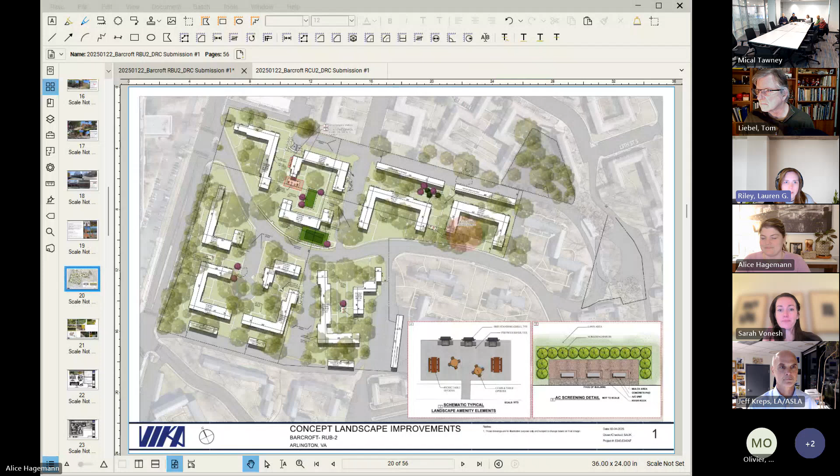Good evening, everyone. For the record, my name is Lauren Riley. I'm with Walsh Colucci. We represent Jair Lynch Real Estate Partners with regard to the Barcroft land use entitlements. And just to introduce everyone here tonight, we've got Alice Hagemann with Jair Lynch. I see Jeff Kreps here with VIKA, our civil engineer for the project. From Traceries, we have Sarah Vonesh. And then from the architect team, we have Tom Liebel, Martin Olivier, and I think Danny Mickelson is here as well. So our whole team will be available for questions as we go throughout the presentation tonight.

And just to give a little bit of background on where we've been and where we're headed, we started this process almost 2 years ago with the first renovation project in Barcroft. We've had 4 renovation projects approved. The most recent one was last June for the phase 4 project. And since then, Jair Lynch and the county have been working to update the form-based code amendments to reflect the vision of the master finance and development plan that was also approved last summer.

Some of y'all may be aware that we went to the expanded Columbia Pike Advisory Working Group a few months ago to discuss those revisions to the form-based code and solidify those changes. Those will be going to the board next month in February. And in terms of the renovations, as we look ahead, we've decided to divvy up all of the remaining buildings to be preserved and renovated in Barcroft into 3 use permits. So tonight we'll go over 2 of them, what we're calling the RBU2 and the RCU2 use permits. Next month, we'll bring the 3rd and final one before you, which is going to be called RA2, and it'll deal with the remaining units down there in the tail of Barcroft.

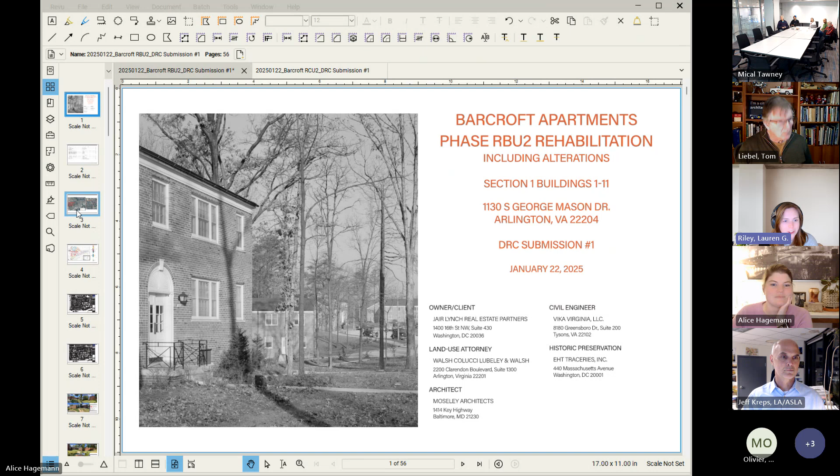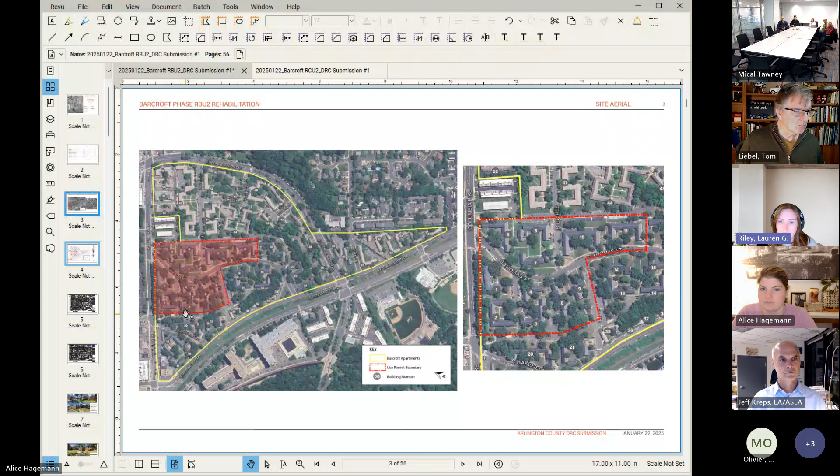And so tonight, we'll move through these presentations in a quick manner, because the scale of these is a little bit larger than what you've seen before. As you can see here, this first renovation phase, RBU2, encompasses 11 buildings and a little over 300 units. So we'll be giving you some highlights tonight over where these are located and the scope of work. Vika will go over some landscape updates, and then Tom and his team at Moseley will hit on the main architectural changes. Once our presentation's over, we're happy to come back to any of these slides for discussion, and these are generally the same ones that were submitted to you a couple weeks ago. So if we go to the next slide, Alice.

So here's that very helpful image that Sarah at Traceries has developed. This shows the location, the outline of this renovation area. So it's 11 buildings, buildings 1 through 11 in section 1 of Barcroft. So these were the first buildings to be constructed in the Barcroft area. Couple things to note here.

We have 2 garages that will be preserved. They're behind buildings 10 and 11. And Moseley and Alice can go over some of the scope of work there, but it's mainly going to be repairing those existing garages to remain. The roofs are intact, and we'll just be doing some cleanup items on those garages.

The remaining 3 garages there that are behind buildings 3, 4, and 8, those will be demolished as is anticipated by the Master Finance and Development Plan, as well as the Columbia Pike regulating plan. I will note that building 3 was in the area that could be adjacent to the conservation area, could be redeveloped. Jair Lynch has decided to keep building 3 as it's not necessary to demolish it for future development. So we'll be retaining that.

And then we've also, as part of the updates to the form-based code, we're no longer removing or demolishing a portion of building 6. If you remember early on in the process, we had proposed putting a resident amenity center in that location for residents of Barcroft. Jair Lynch has now decided that that resident amenity center will be located within one of the new construction buildings, and so we won't need to alter building 6 or demolish it to make way for that resident amenity center, though you'll see in some of the landscape updates where we're providing some more usable space there for the residents as a whole.

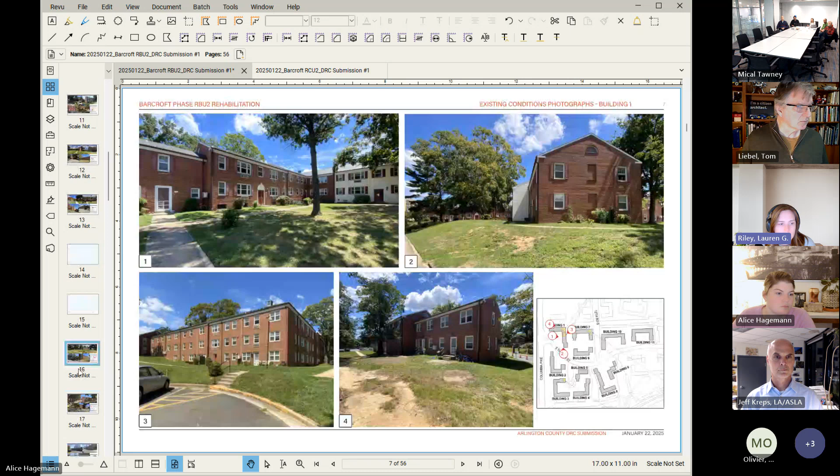And then we're going to skip through some of these more technical slides and the photos. Happy to come back to these if we have any specific questions. And then in terms of the scope of work, this is going to be very similar to what you all have seen with the past 4 renovation projects.

We will be cleaning up the brick, infilling openings for exhaust systems that we no longer need, and adding new openings to accommodate mechanical equipment and exhausts. Primarily, that will be on non-primary facades. And then we'll also be replacing light fixtures, shutters, railings, etc. We'll be making some improvements to the courtyard to provide and program some of that outdoor space for the residents.

Here in this use permit, we'll be creating 5 type A accessible units. This will occur partially through conversion of 3 existing units to accessible, and we'll also be able to add 2 new type A accessible units in this section. And then along with that, as with previous renovations, we'll have to introduce some new penetrations and enlarged openings to accommodate those new accessible entrances. There'll also be some ramping in a few places as well, and I think Moseley can go over where those instances occur.

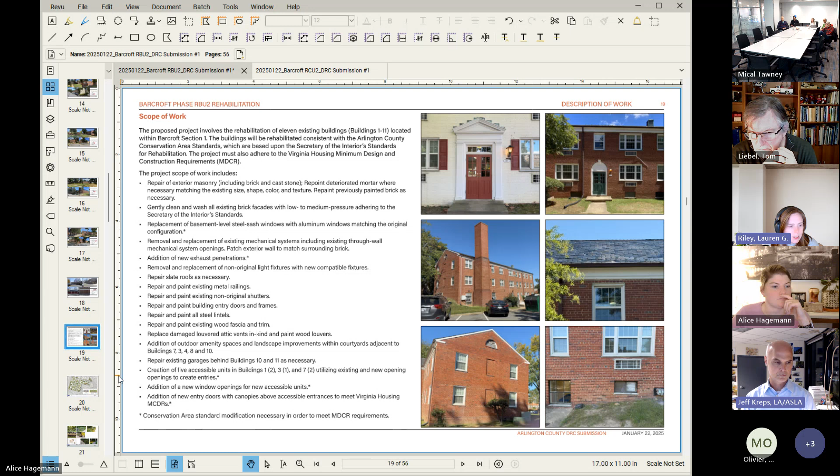And then with that, I'm going to hand it off to Jeff and Vika to go through landscaping, and then I think he'll hand it off to Tom at Moseley to go through the architecture, and after that, we'll quickly go through the highlights of the second use permit, and then we can open it up for discussion and Q&A.

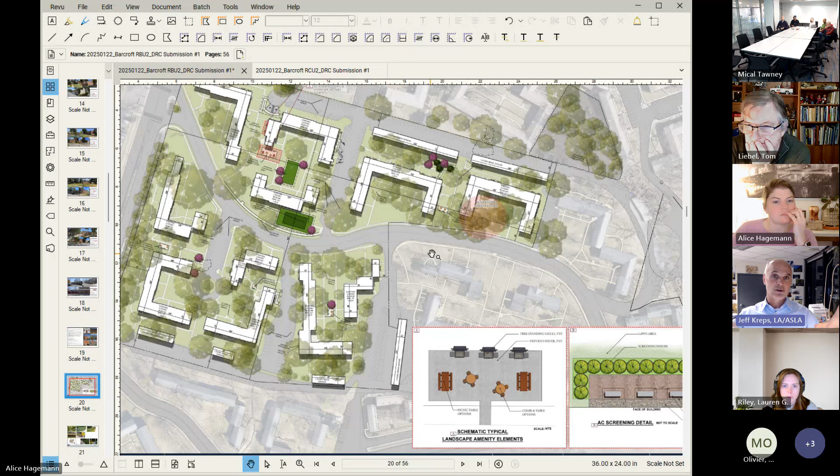Which is something that was approved with the MFDP plan set. And it's what amounts to a series of pathways throughout the Barcroft property that help the community, not only the residents, but the community at large who may come through the Barcroft site, basically experience the natural characteristics of Barcroft and also learn a little bit about it.

So what that really boils down to is we're utilizing existing sidewalks on the property to take people from essentially, if you're going east-west from George Mason up through the site, through the RCU2 part, then across Thomas Street and then to RUB2, right? And then ultimately all the way down over toward Four Mile Run. And what it amounts to, as you can see on the screen here, is, again, we're utilizing existing sidewalks. We have to be careful when we're planting underneath existing tree canopy, not to disturb the roots.

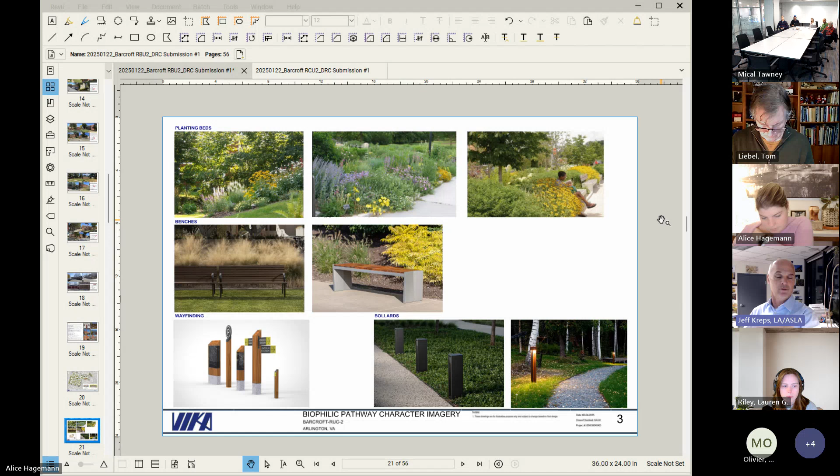And so what we're trying to do is provide low-level, ground plane level, enhanced planting. Because right now, if you've been out there, if you remember, it's primarily just really tall trees and then grass. And there's very little in the way of shrub planting. So our goal with this pathway is to enhance the pathway with some nice seasonal native planting that, again, helps reinforce the idea that you're in nature.

We're going to provide the occasional bench for someone to stop. As you know, it's hilly. People are going to walk and they're going to want to maybe have a place to pause and take it all in. So there would be benches periodically. We haven't finalized the last details, but there would be some sort of bollard or marker lighting along the way, not necessarily for safety, because there is existing site lighting on site, but a way of sort of lighting the way. It's the yellow brick road from here to there, right?

And so what we're showing in the lower right-hand corner are some ideas of what that might look like, right? Some lighted bollards or some non-lighted bollards, bench ideas. And then there would be occasionally some wayfinding, and perhaps some interpretive signage, used to describe the ecosystem of Barcroft, what you're walking through, what's above you, what's beside you, and then helping to begin to tell a story throughout the entirety of Barcroft.

And again, this is open to the public, people who wander in through the property, cut through the property, as well as the residents. And it begins, I think, to add an element of richness and detail that currently doesn't exist. And it will, in a sense, also help get you from point A to point B. If you look at it, you can follow it and go all the way from one side to the other.

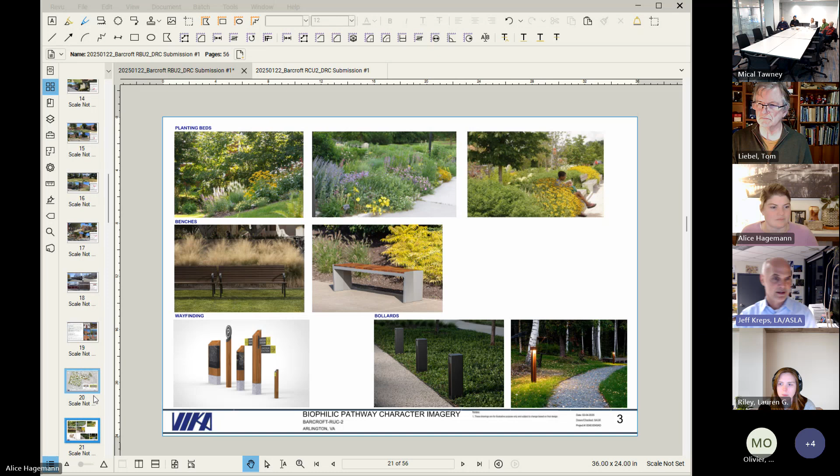The other main axis will be Thomas Street, which runs north-south. And the eastern side of that street would also have, again using the existing sidewalk, this kind of planting, in addition to some street tree infill where we can. And again, it begins to define that edge and introduce another layer of interest for people using the sidewalk. So that's one of the primary components of both of these use permits that are before you this evening. And then if you want to go to the next one, we can talk quickly about RUC2.

Do we have the plan map? I was going to go, Jeff, I was just going to go through all of the RUB2, okay, and then we'll come back. Yeah, that's great. Okay, cool.

And I wanted to interject and say, I'm sorry I don't have a plan of the biophilic path locations readily available, but if anyone's interested, at the end of these presentations I can pull it up, or while we're discussing that, I can follow up with that in a little bit.

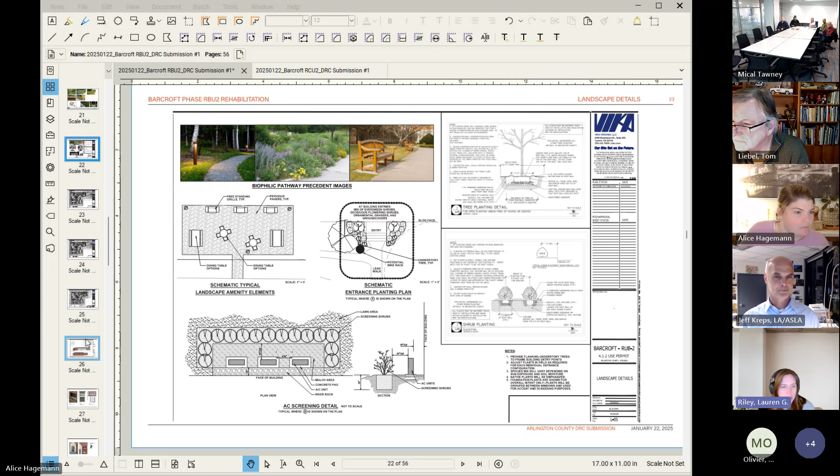All right. With that, Tom, you want to take it away? Absolutely. And thank you all. And it's great to be back here.

I'm going to branch off of what Jeff was talking about and emphasize the notion of flat. We have been struggling throughout working on the campus here to provide accessible units, and to remind everyone, accessibility isn't just about being able to get into the building at an accessible path. It's actually getting to the building. And so many other parts of the site here, you simply can't get there.

You can't park and then find a path to get to a unit that's accessible. So we do have more accessible units here than we've seen previously. The modifications that we're suggesting are sort of twofold, one of which is preserving, maintaining, and repairing the existing buildings. And the other one is creating these new accessible entrances and egress for some of the new lower level entrances.

But as you can see on the building diagrams, like on the upper one there, elevation B north for building 1, a lot of what we're doing is kind of undoing bad things. There are these large through-wall mechanical units that we are demolishing and re-infilling with brick to match. So we're actually undoing some of those insensitive installations from the past. And on secondary elevations, we are looking at creating much more modest brick-sized louvers for required exhaust systems.

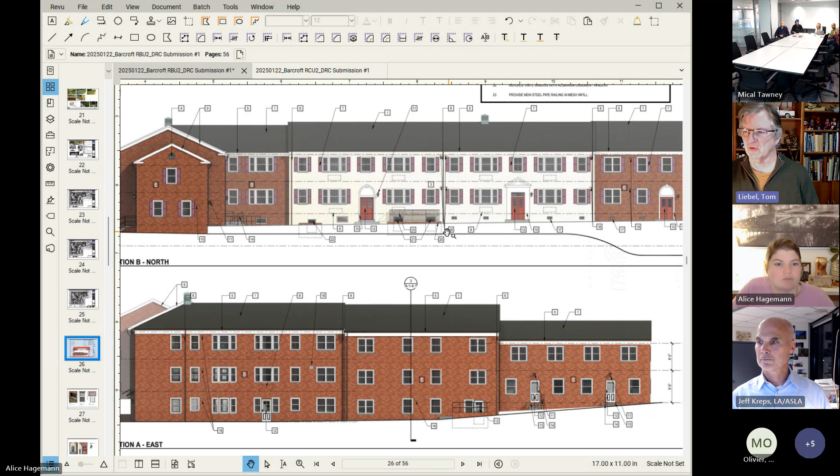A lot of these, and the general repair of the existing entries there. You are seeing a couple things like the little hatched wiring you see right there. That is where we are proposing to extend areaways down to create egress windows for some new lower level units there that are required by code. For the most part, they are out of the way. They are down below, and modifying those openings seems to be much less significant than modifying any of the upper level windows there.

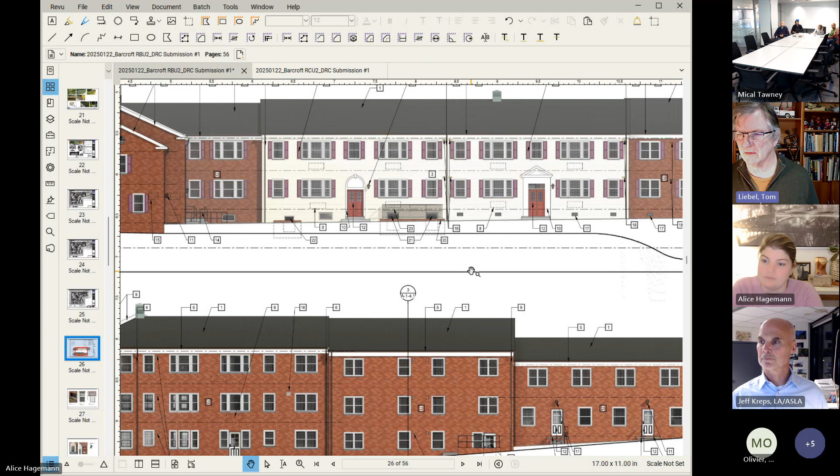And then we've been using design based on the existing pipe handrails, but to provide code compliance, we're showing these infill mesh panels to make sure we can pass the 4-inch sphere rule that's required by code. Those are sort of the primary things, and you get to some of the other modifications that are tied more to accessibility on some of the other buildings.

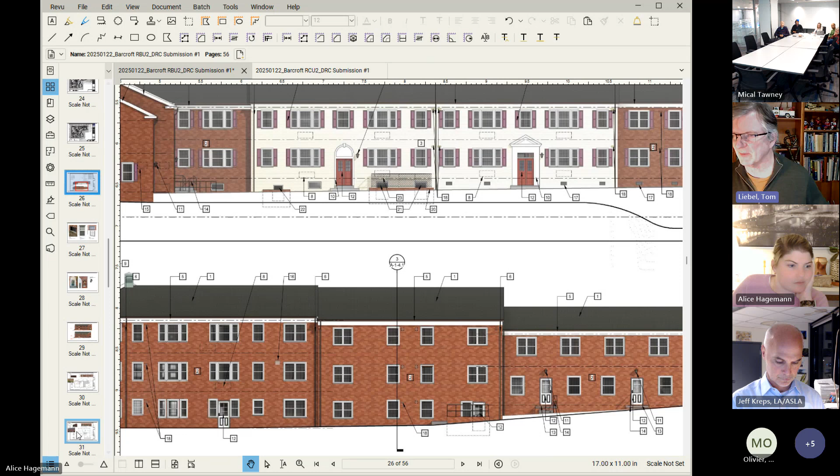As both Lauren and Jeff mentioned, we are looking to create or widen some existing openings, or create some new openings, and with that, they would have a new covering associated with them, a new canopy, trying to meet the requirements that Virginia Housing puts out, while also meeting the historic preservation requirements here. So we are not providing coverings over the existing entrances, which open into stairways and into units, which, while technically required by Virginia Housing, we've gotten variances for. While we are showing those coverings over the new entrances that are directly into the accessible units.

Number one, it's a Virginia Housing requirement, but also it's just good practice to provide that covering, so during inclement weather you can get into your unit there. Fundamentally, all this is work that you have seen previously in our prior submissions and ultimately found to be permissible by the commission here. So that's it in a nutshell.

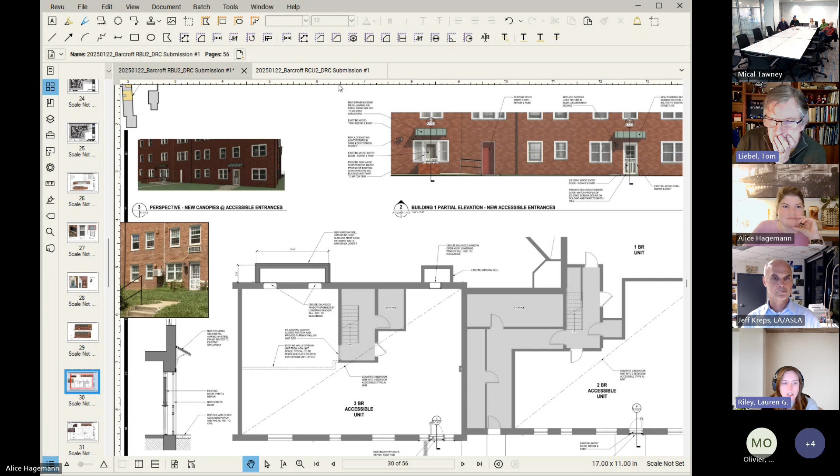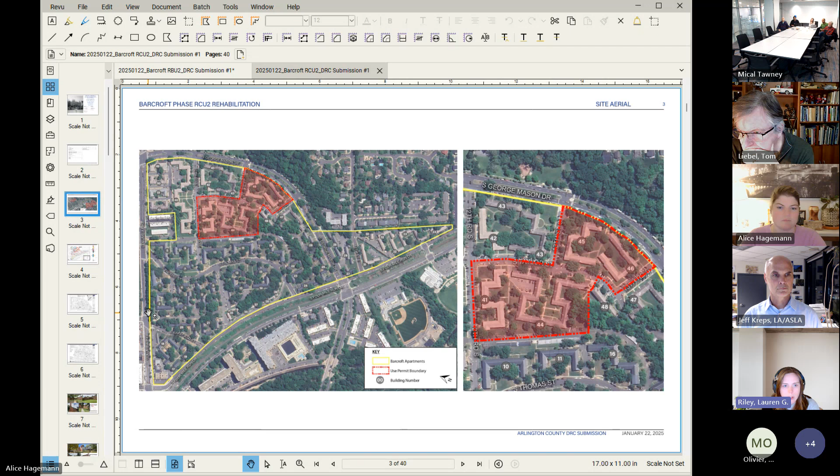All right. Thanks, Tom. And then let's quickly go through some of the RCU2 submissions, just to highlight where these buildings are and what the scope of work will include. So here, this use permit will include 4 buildings. You can see there, buildings 44 through 46, coming off 12th Road South and headed down toward South George Mason Drive. And if we go to the next slide, you'll see these buildings are located within sections 6 and 7 of Barcroft. These were constructed later, in the late 1940s, as part of the latter phases of Barcroft. These existing buildings today include about 220 units.

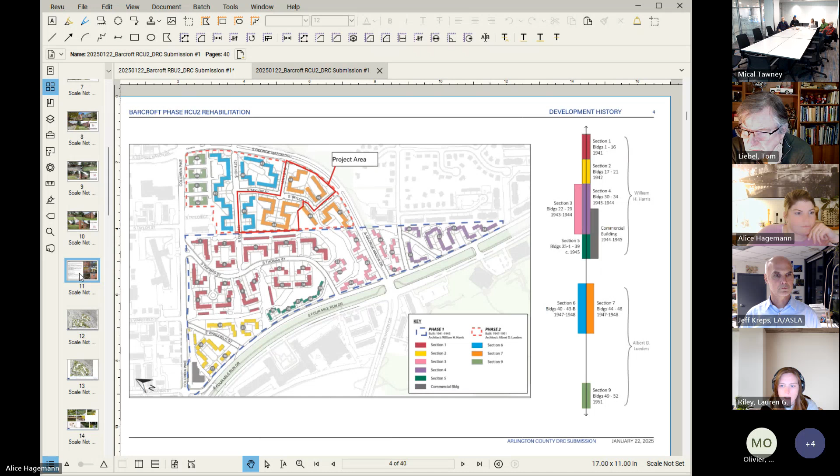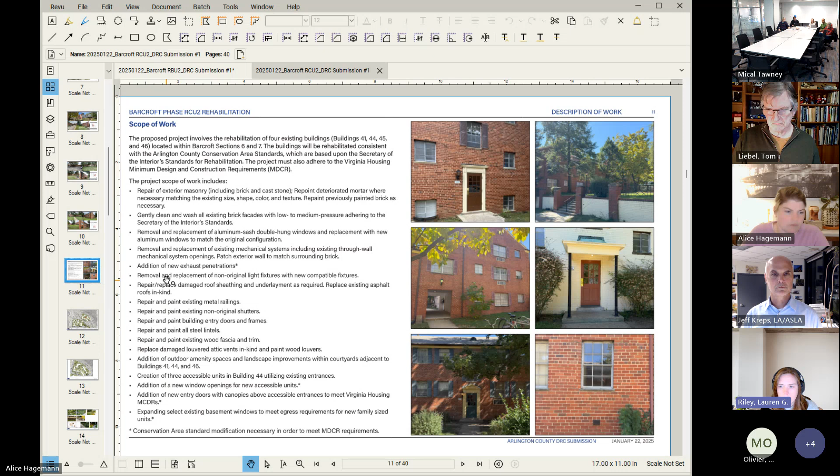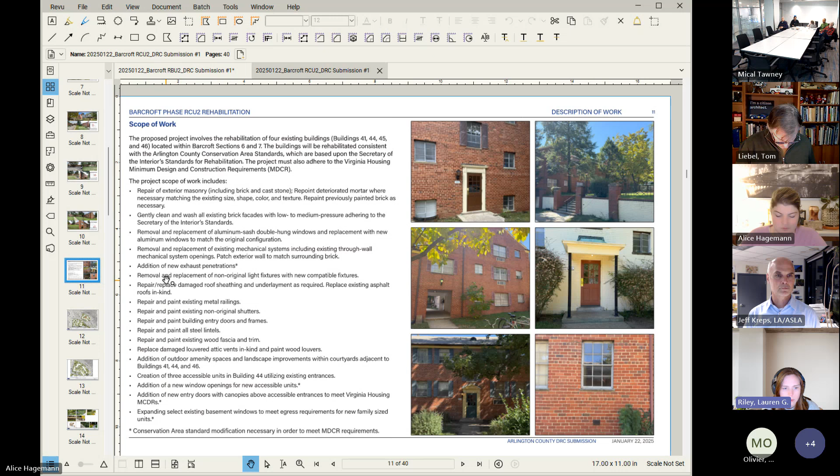And then we can get into the scope of work slide. Again, almost the same scope of work that we discussed for the previous use permit. There are no garages in this section, so we won't be dealing with those, but we will be cleaning the brick, replacing mechanical equipment, so infilling brick and introducing new penetrations on non-primary facades. In terms of accessible units, we're able to create 3 accessible units in building 44, through a conversion of existing units. We'll have the same Virginia Housing waivers and the same form-based code modifications here. And so now I'm going to hand it to Jeff to show you some of the site-specific changes that we're doing to accommodate those accessible units and general upgrades.

Hope you're muted. Thank you.

So just to help orient you, George Mason Drive is sort of arcing along the top of this drawing. Columbia Pike is way off to the left in plan view. So this section abuts the previous one that we just looked at. And rather than go through all the details, similar things are being proposed here. As we mentioned, individual building-oriented small outdoor gathering spaces in these little courtyards.

And then, as Lauren said, sort of central left, you can see where we're adding parking spaces, ADA compliant parking spaces to get into the buildings in that unit. That's one of the flat spots again on the site, so it worked out very well from a grading standpoint. So that's all fairly unobtrusive. And then they're on the bottom side as well.

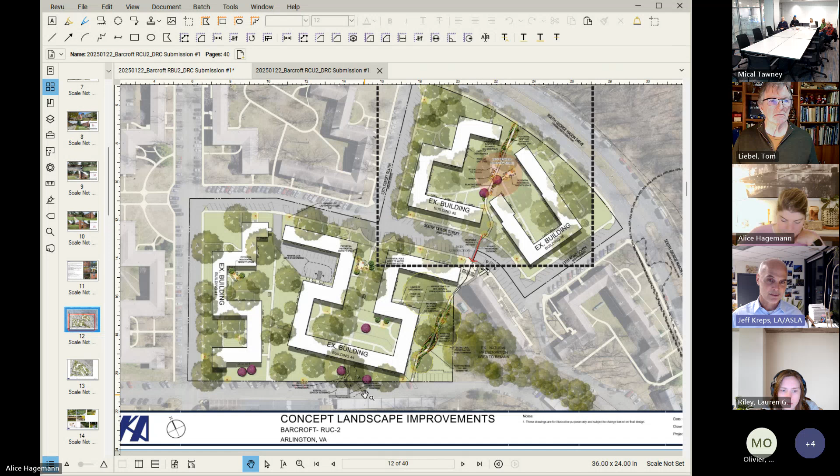Now, one thing I will spend just a little bit talking about is this plan shows perhaps a little better than the previous one the biophilic pathway, right? So it comes from George Mason and is effectively going uphill from George Mason, all the way between the first buildings. It crosses the street, then continues up through what is identified in the Columbia Pike and the form-based code as a natural preserve area, which is sort of toward the bottom of the page there, underneath the tree canopy.

So again, our goal is to be as sensitive as possible to the existing tree canopy so as not to disturb those root systems, while at the same time providing an extra layer of ground plane planting to, again, create a tapestry of native plants that are used throughout the project, begin to bring some unity to pedestrians moving through, and to identify this particular element as a thing within Barcroft. So that's the high level, right?

And then there are a couple of places where the trail ends and we're no longer on sidewalk, and we're going to, via some sort of painted asphalt implementation, show people how to get, again, yellow brick road, right? How to get from point A to point B with some signage, and then they continue on their way. So it's a really nice opportunity to do something that benefits not only these residents, but also the wider community. Because again, with some interpretive signage and some level of detail, it'll be a very, very pleasant walk through what is already a very nice site.

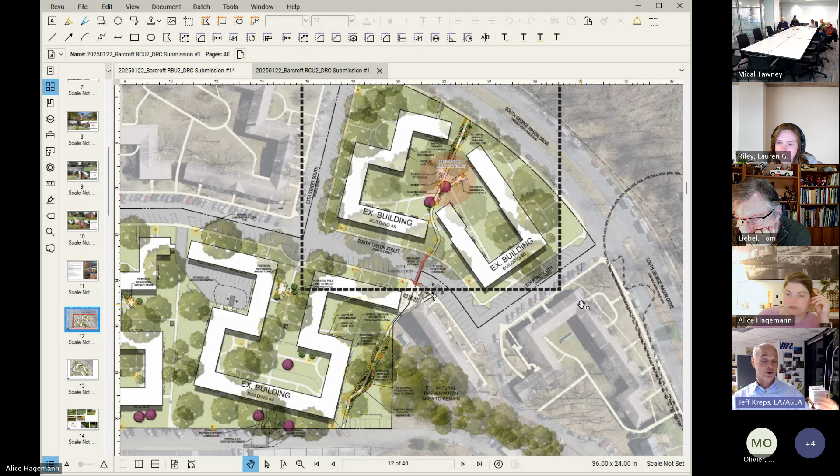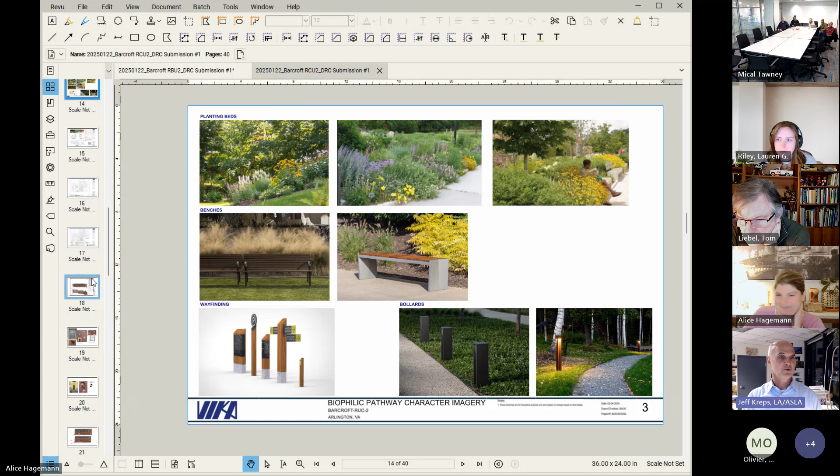And with that, I think that pretty much sums up what we're doing on these sites. That's just a blow up of what we were just talking about, and then the same elements that we're proposing to carry throughout the project. So again, similar kinds of detailing, wayfinding and lighting and benches and whatnot. So that, I think, about sums it up.

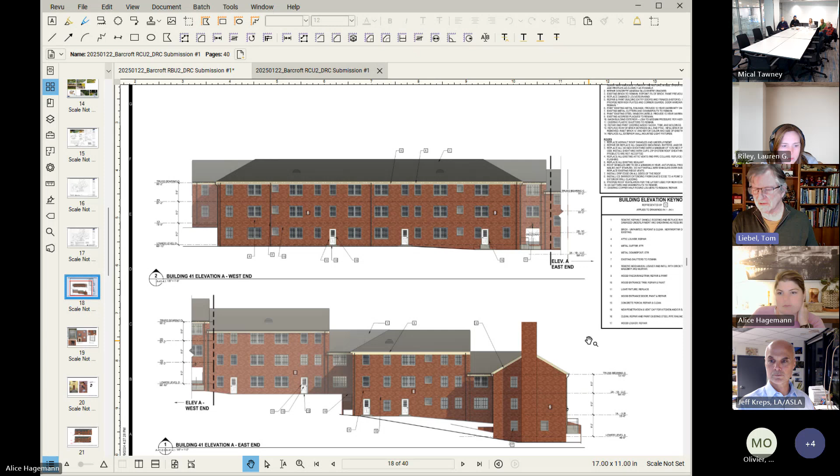All right. And similarly speaking here, the vast majority of our work on the building exteriors here is standard preservation, conservation, cleaning the brickwork, repairing damaged material where necessary, replacing some light fixtures with compatible lights that are modern, and then in limited areas creating, there we go, right there, light fixtures like that.

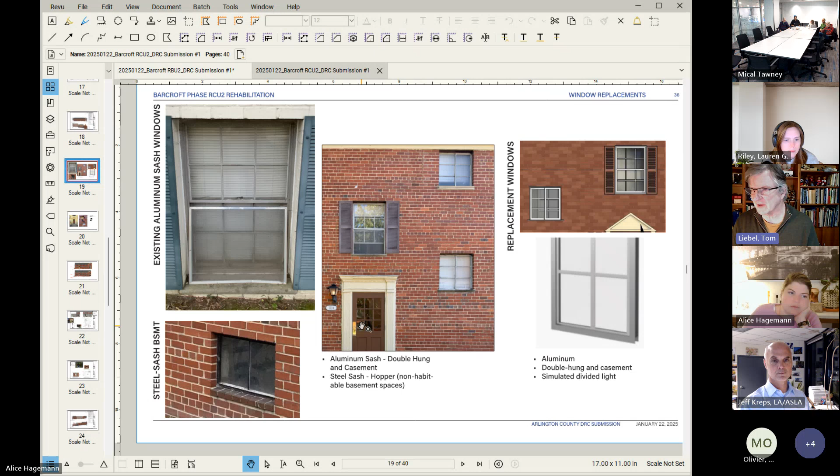Requesting variances from Virginia Housing for the majority of the spaces, and then ultimately looking at some window replacements, aluminum clad, and then ensuring that the design and execution of the windows is consistent with what was there previously in terms of the frame dimensions, the mullion thicknesses, the demising of the lights, to match what's there existing. Once again, work that you all reviewed previously, and we're just trying to maintain a similar approach in these new phases here.

Then these are where the new accessible units are as well, exactly. So creating those new opportunities on secondary elevations. Once again, we've been very conscious of trying to make sure that when we are doing efforts like this, they are on secondary elevations and not on the primary elevations that are fronting onto the roadway here. So trying to find ways to tuck them in as discreetly as possible.

All right, thanks, Tom and team. That concludes our presentation. I know we've zipped through quite a few slides, so we're happy to go back and bring anything up that you all want and answer any questions that you have. Thank you. Immediate thoughts, questions?

The awnings over the doors, I assume that's been looked at before and the design's been approved. Yes, Lauren, that's correct, right? That the awning design is the one that has already been looked at. It's the same thing, the one that the HALRB's already been okay with. Yes, this is that standing seam metal awning. It's the same one that you've seen on the prior couple of use permits.

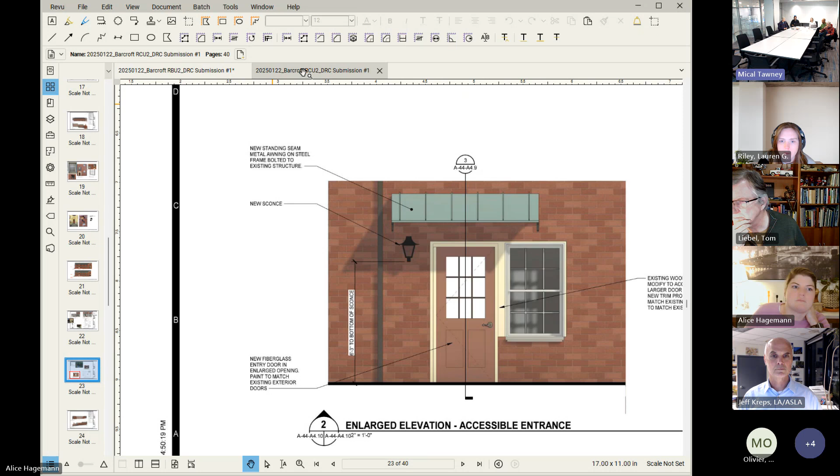Okay. And then again, we'll only be retaining these above the newly created accessible units, which I think would be 8 units in total across these 2 use permits. And those are all on secondary elevations. That's correct. We don't have any new entrances on primary elevations.

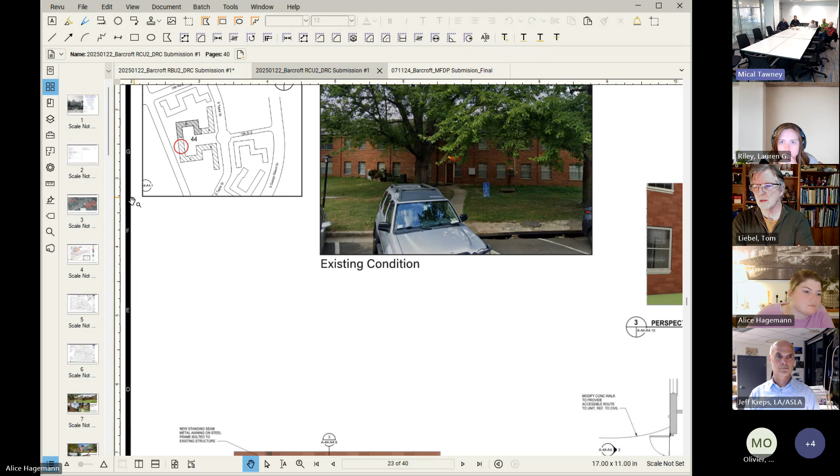And then, are there some buildings that have existing awnings? Currently I noticed a couple of sort of almost triangle-shaped awnings on buildings. Yeah, they're not really awnings as much as they are sort of pediments. What we were striving to do is create a sympathetic yet visually distinct new canopy element that goes with the existing buildings, but does not read as part of the original material. So you can clearly understand what was original and what's been added in.

Yeah, and where you do see these existing elements, these are typically in the phase 2 portion of Barcroft, like this one shown here. And I think we had 1 or 2 in the renovation use permit we did last year as well. So as Tom is saying, we're evoking that similar style with the new awnings in front of the accessible units, but not replicating it exactly.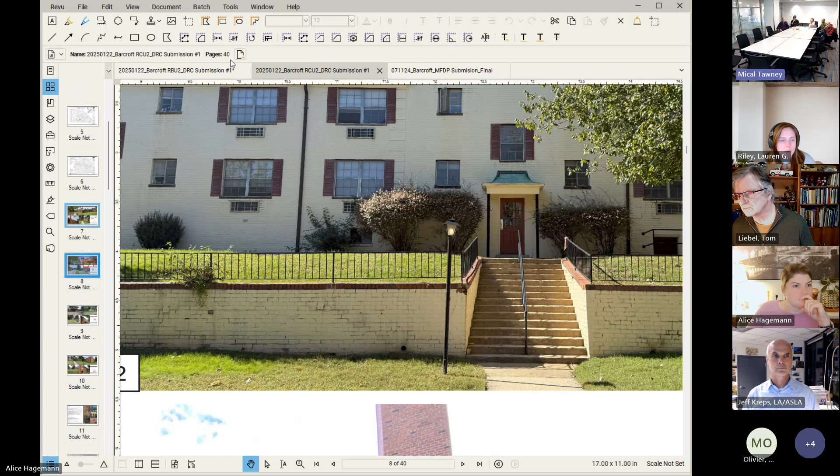I had a question about, I believe in the section 1 portion, where there were going to be windows at the lower level for egress, and then there was some discussion about a mesh situation in front of it. Panels, yeah. Can we get a closer look at that? So what we're proposing is basically a standard pipe rail frame, matching that which is there on site currently.

However, since it would be a new element, it has to meet current codes. It's called the 4-inch sphere test, and you can't pass a 4-inch sphere through any part of that railing. So we're proposing a mesh that is as transparent and minimally visually intrusive as possible. We felt that was a little less onerous than doing something like 1-inch pickets at 4 inches on center.

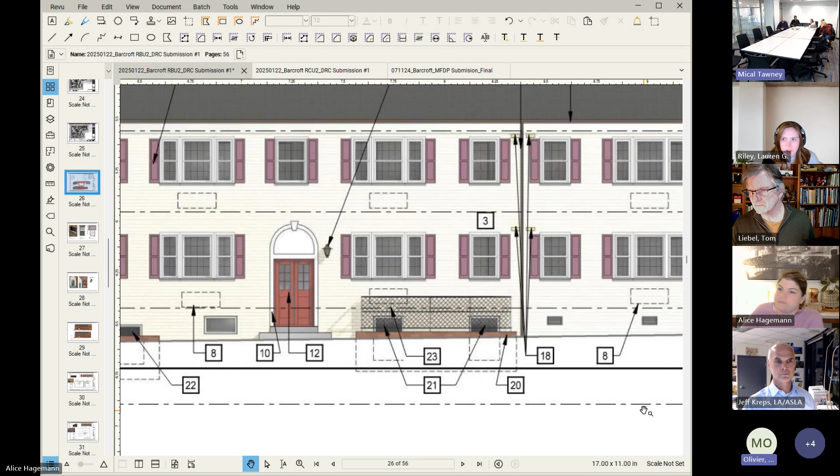Yeah, and I think the reason you're seeing the mesh now and not previously is, Tom, is it right that there were already railings there in previous locations where we had to enlarge the windows, but here there weren't, so now we have to meet the current code requirement. Okay. And although we don't regulate color, I assume they're going to be painted black like all the other rails? Correct. Because when they're painted black, they disappear a lot better than if they were white.

It's the nature of rendering here that the mesh fabric itself is less visible in real life than what you're seeing right now, but it's just the artifact of trying to draw something at a small scale. Even tiny lines get fatter.

Just a quick, maybe dumb question, but if you escape from the bedroom units, how do you get over the rail or through the rail? It's a matter of climbing out, and the notion of it being there is also for fire rescue being able to access from top down. So it's not just residents getting out, but it's getting fire personnel in.

Well, that's all fine and good, but if the building's on fire, how does the resident get out of that space? There should be some sort of gate or steps or whatever so they can get away from the building. That is a good question. We can look at potentially adding a little ladder element or something in there.

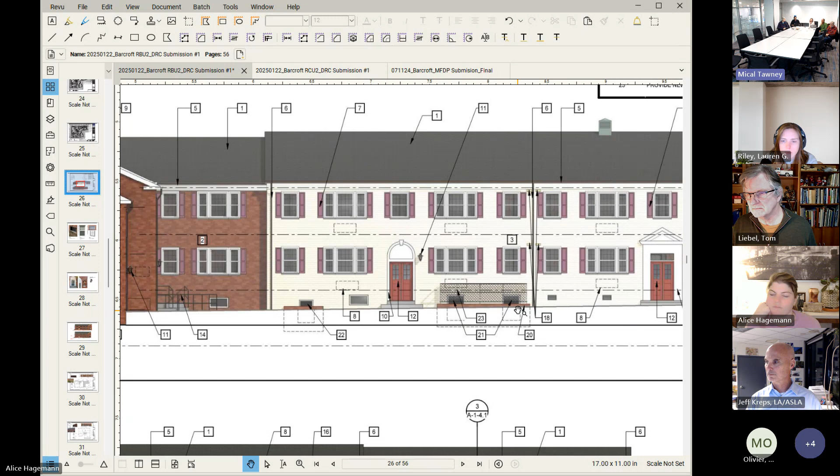Any other questions, comments? On the landscape plan, what were the purple trees? Were they just design? It's just a graphic convention to indicate a different species, perhaps an understory tree. Yeah, are those the smaller understory trees, Jeff? Yeah. Typically that's something that's flowering, so dogwood, redbud, something like that. That's just our way of differentiating those from a larger canopy tree. Okay.

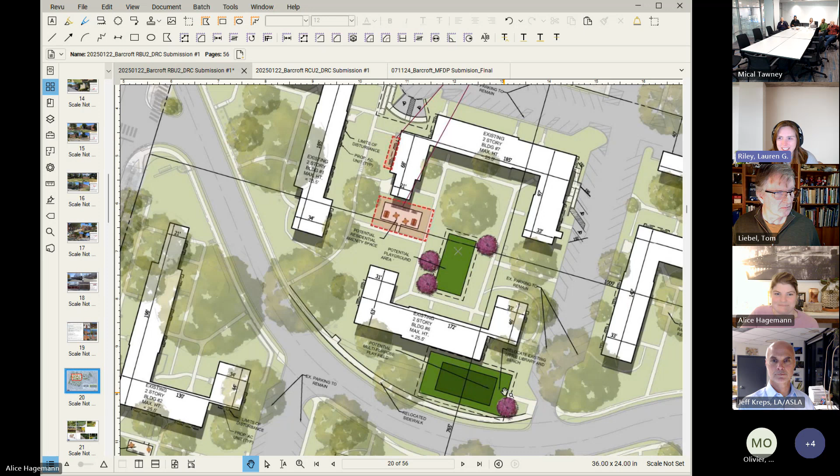All right. Anything else? Yeah. Can we see any of the accessible units, ramps and whatever, how those look? I assume they look similar to what has already been proposed, but I'd like to see one of them. Yeah, Alice, so the page you're on before had one with a ramp on it. Yeah, I was gonna say, I have them all in one section here, so this is the first one.

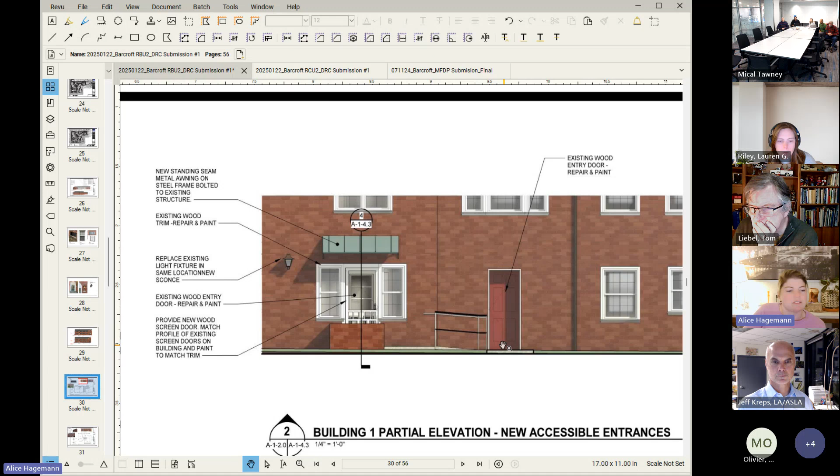You can see the existing condition here, and this one doesn't have ramping, to Lauren's point. I guess there's a small ramp in front of the, sorry, let me just go here, while we're here. So small ramp here. This one is a more intensive ramp. As the whole team has mentioned, topography is not in our favor here, but we were really grasping at straws to find these accessible unit locations.

This is really similar to what you all reviewed in our second renovation phase down near the tail of Barcroft, where we had these kind of switchbacks or longer ramps that are needed to get you up to the entries. So I think Tom and Jeff were using the same kind of materials and treatment here as previously. Correct. Yep. But, well, this seems like an awful long ramp, or if it's a switchback, even more so.

Well, it's actually one directional. It's a ramp in one direction, but once we get up to an entry elevation, it's basically a walk down to get to the other one. So it's not switching back; it's ramping up. You would have the same amount of ramp to get to just one unit. But once you're already up there, you can traverse down to get to the second unit. So we're using one ramp to get to two entries.

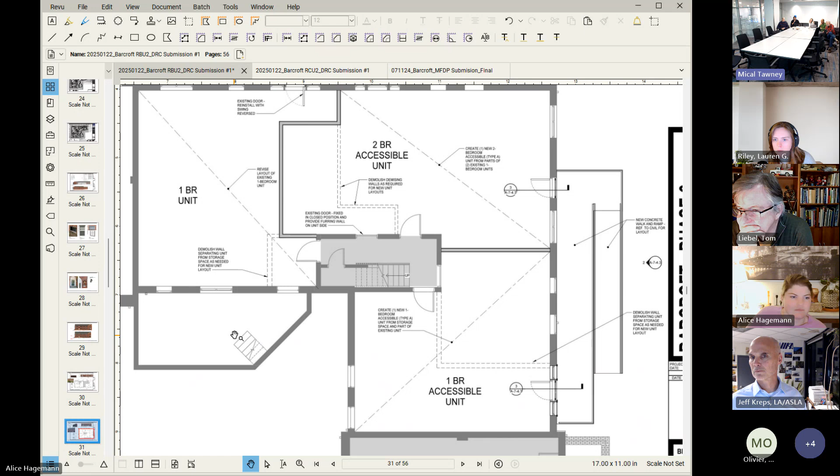Yeah, I see that, but it seems like what you're doing is putting a pretty significant amount of access and calling attention to the fact that it is accessible. And in my opinion at least, I think that's detracting from the building. But they need to get the handicapped up there.

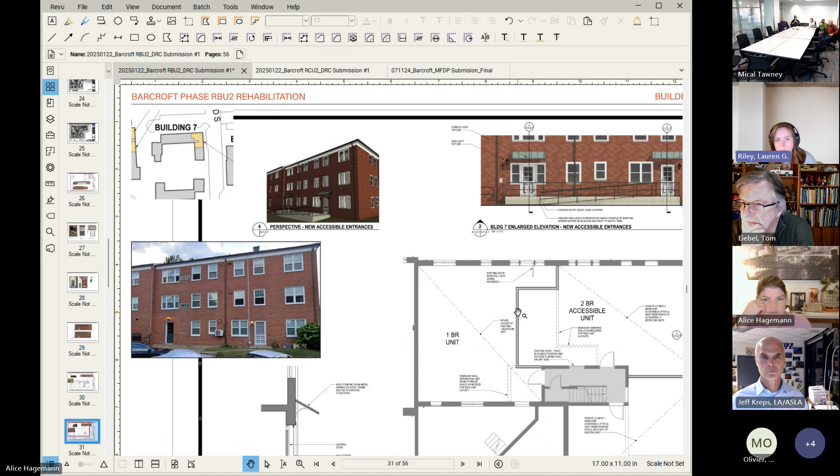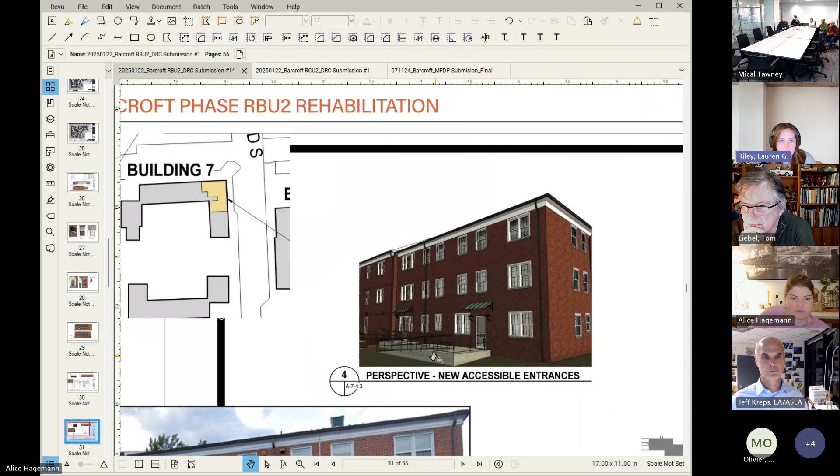And Andy, what I like about it is that by putting the ramp in front of the platform, it minimizes the size. You can imagine this being much bigger, actually. If it were one linear ramp, it would be larger. That's why I've kind of folded it in there. If we look at the perspective at the top left of your screen where you see building 7, that shows where these entrances are relative to the rest of the buildings, tucked back near the parking. That's another reason we've located them here.

As Tom said, accessibility is not just about inside the unit, but about getting to the unit. So this allows folks to get from the adjacent parking over here into this side elevation of the building. And it is a side elevation, not one of the primary elevations fronting onto the street. So it'll be relatively tucked away and not noticeable unless you're in the interior of the site.

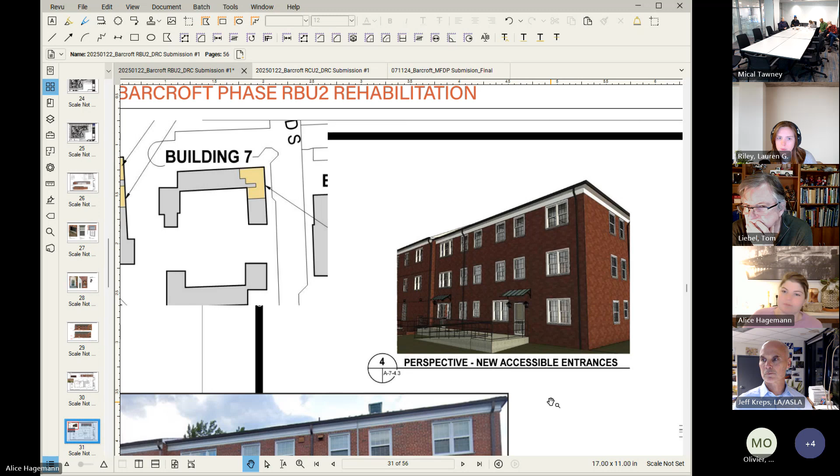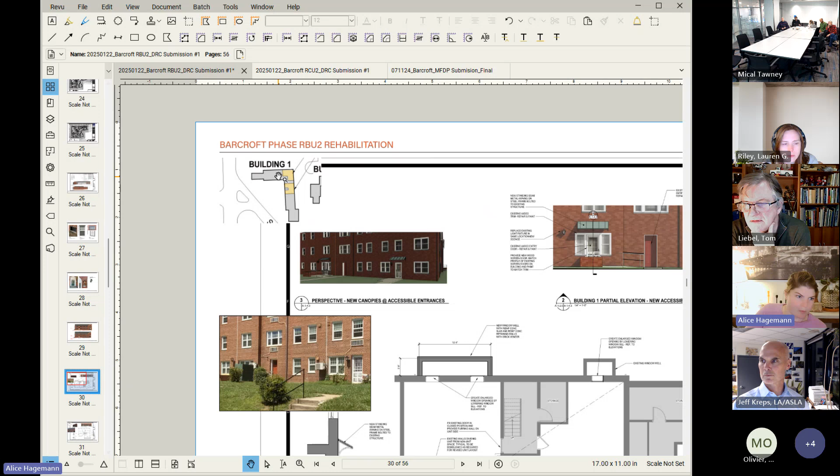Are any of these proposed within the little courtyards that you've got? Typically, the primary facades are off of the courtyard, so we've done our best to locate ramping not in the courtyards. This last one we looked at is also on the outside of the building. Here's the key plan up here. Building 1, building 7 we were just looking at, and building 3 is the last one, where the courtyard is inside, and we are creating a new entrance on the end of the building.

We have done a fairly extensive study on the entire campus, working in partnership with Jeff and his team, to identify which spaces you can even begin to get to, and once you get to it, can you get in? So the areas we're proposing here, after a significant amount of study to get the limited number of units that we have, are the ones that have the least impact on the historic resource.

Well, I'm concerned actually with two things. One is impact on the historic building, and believe me, I used to work for an accessibility architectural firm, Paralyzed Veterans of America.

And one of the issues with accessibility is that for people, whether they're in wheelchairs or using walkers or whatever, calling attention to their disability with long ramps and, using their words, making a spectacle of their getting in is really not a good idea.

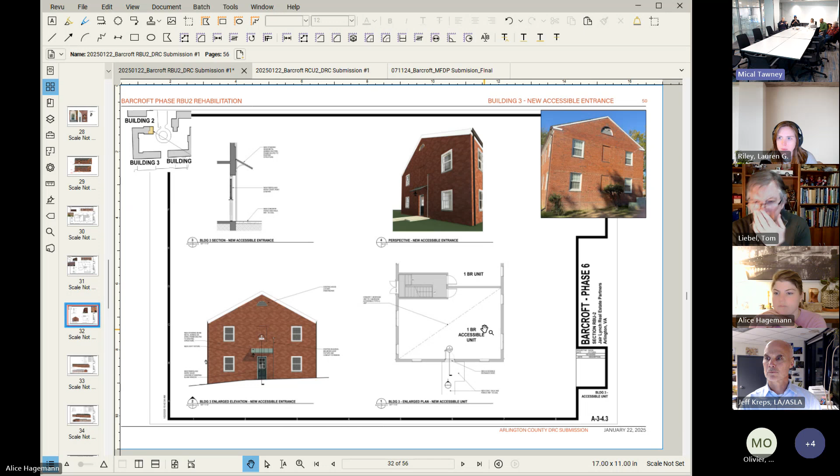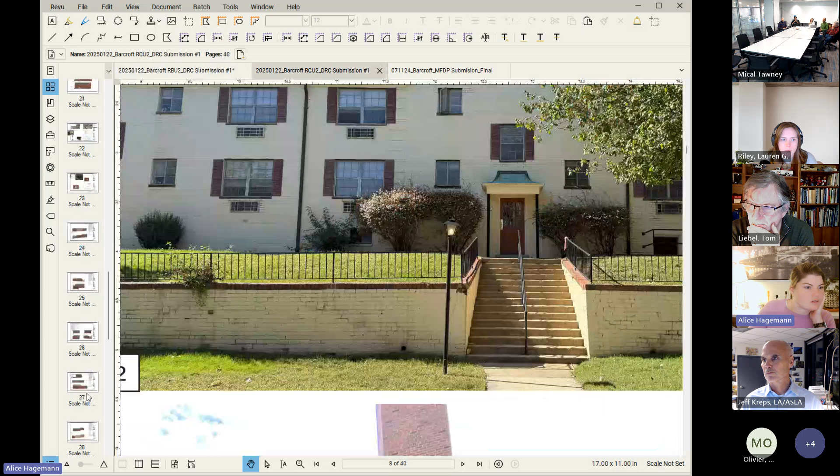In this section, this use permit that we're looking at, we've had previous phases with ramps that we've presented to y'all, and so we have other locations in the site that have ramps, but here in RBU2, this is the only one, and excuse me, I have to check. I believe here at RCU2, yeah, we don't have ramps at RCU2. The other point I would

point out is that we have tried to design the ramps as sympathetically as possible, to use railings that look consistent with the rest of the site, to use kind of a brick cladding on the wall there, so it looks like a retaining wall, so that we're attempting to create the ramps that are needed or necessary for access in a way that is consistent with the design vocabulary of the overall campus.

And we're very sensitive to your points, absolutely, that we're trying to minimize the visual impact of these accessible units. And what you're seeing here is the worst case, where to make these units accessible, we have no way to get up beyond that. The other units that we've been suggesting here, as Alice just showed, they have a canopy over it, which is currently perfectly appropriate for an entrance. And beyond that, you wouldn't know otherwise. Okay.

One final question on that. Has there been any consideration to doing some landscaping around the edges of it just to soften it up some? Absolutely. I think that's one of the things we'll get into when we do the final landscape plan. One of the things you don't see at this scale of plan is there would be enhanced planting at each of the entries around each building. So all the stoops will have some sort of enhanced landscaping. That would be the same here.

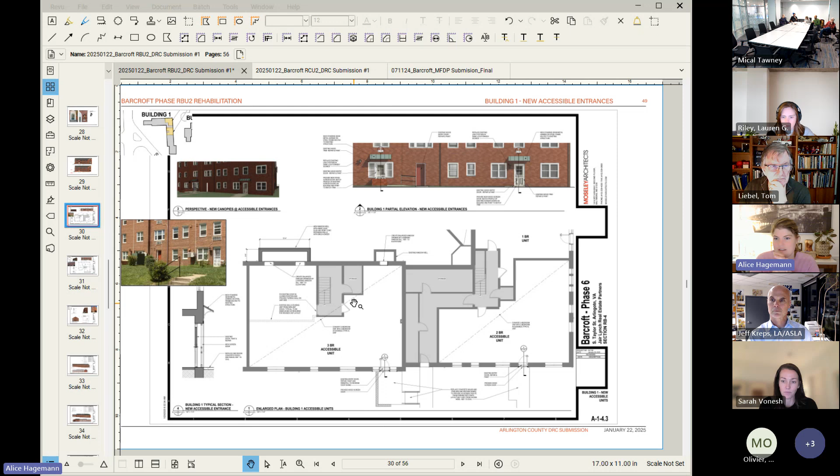But we'll be making sure they're either factory finished or painted in the field to match existing, and we'll be working closely with Sarah and Sarah's team and Tom's team to make sure everything's compatible with what's existing. Or sorry, I shouldn't say compatible, but appropriate for what's existing. Thanks.

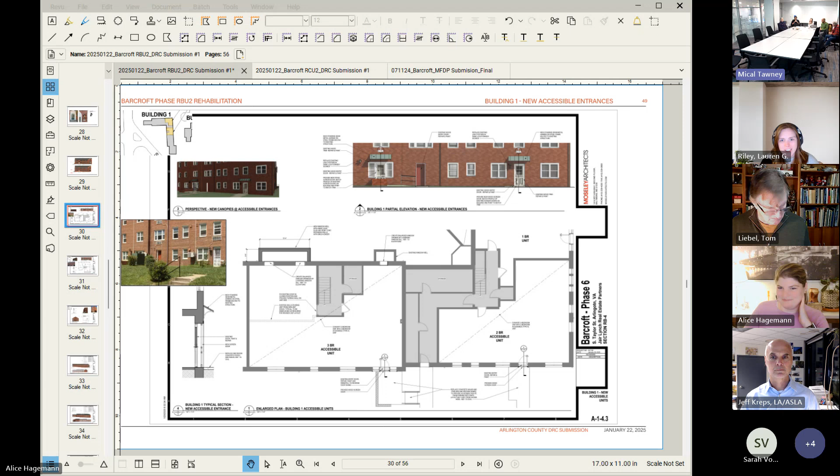Good night. Thanks. So we're gonna make a recommendation.